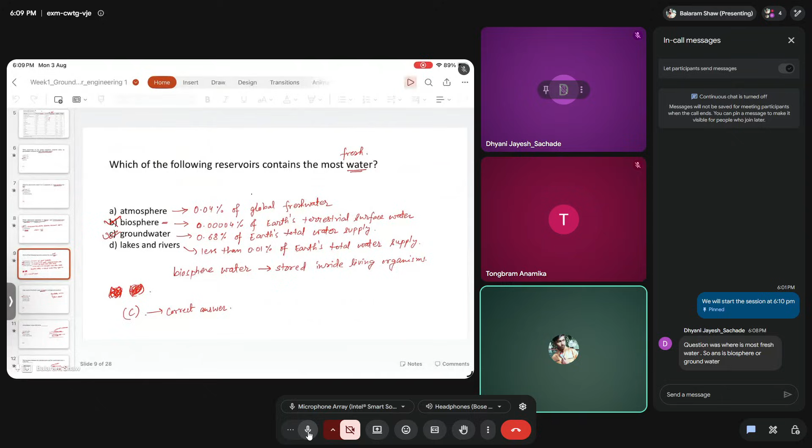Yeah, regarding that question, last time I have also put it in the... Let me check. Yeah, in this I have put. So here in the biosphere water, what we were referring to was the water which is stored inside the living organisms. So if you consider that, then it is nearly 0.00004% of the Earth's terrestrial surface water. So in that case, as I wrote here, and this work I have also shared in the folder, you can check there. So you can see here for atmosphere.

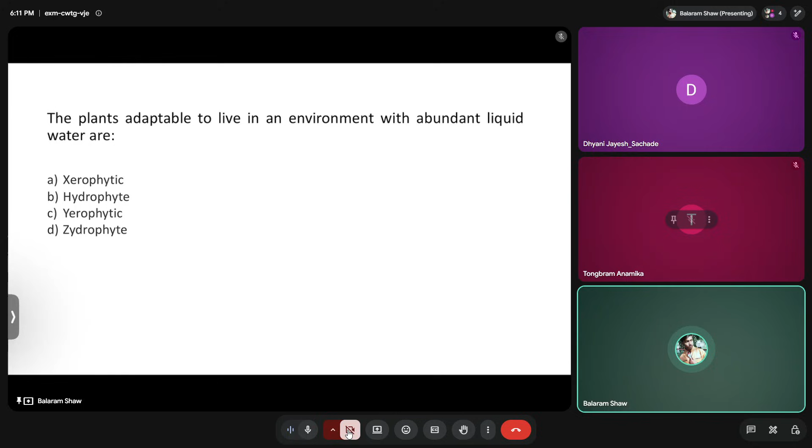Okay. So in this week's lectures, before going to that, in the last week at the end or in this week only, we had a question: the plants adaptable to live in an environment with abundant liquid water are... So you can put your answers in your chat box or you can speak. Okay. So last week also we have discussed, and this week also, the question here is the plants which are adaptable to live in an environment with abundant liquid. What do you think the answer will be? A. Okay. Anyone else? Anamika.

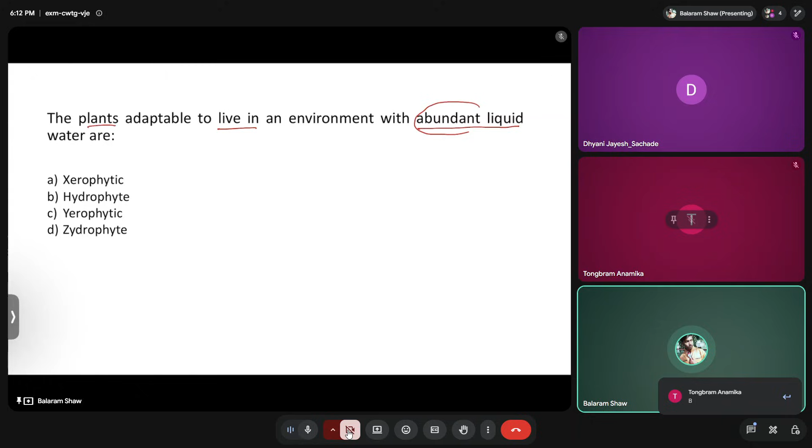Okay. So here, what is the question? The question is abundant liquid. Abundant liquid as in where enough amount of water is there. So xerophytic plants, as Dhyani said, are the plants which are adaptable to survive in an environment with little liquid water. Last week I discussed that in a desert environment, if we have to reduce the desertification propagation, we put xerophytic plants because those are the plants which need less water.

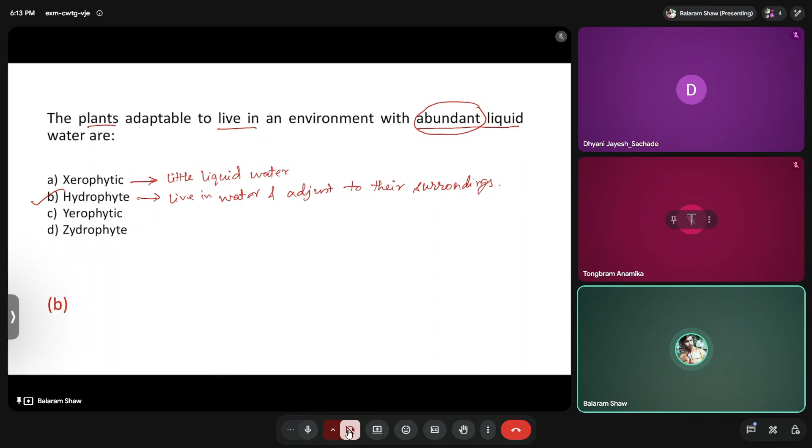Whereas here the question was with abundant liquid water. So hydrophytic plants are the plants which live in water and which adjust to their surroundings. So the correct answer for this will be B, that is hydrophytic plants. Okay. So before going to the other questions, let us discuss first. The first lecture of this week was related to surface water versus groundwater.

So we know what surface water is. Surface water is the water that is available on land, and it can be in any form. It can be in the form of rivers, oceans, seas, lakes, or something like that. Whereas, what is groundwater? Groundwater is the water that occurs below the earth's surface, right? So when it is below the earth's surface, it occupies all or part of the void spaces.

So if we write here, it occupies all or part of the void spaces. In many places you will see that void spaces is written in terms of interstices, so that is also used interchangeably. Okay, so groundwater occurs where it occupies all or part of the void spaces in the soils or geological strata.

So it occupies all or part of the void spaces in soils or geological strata. So why am I calling it all or part? Part is because all the rocks are not fully saturated, or let's say the voids in these soils or rock layers are not always filled with water. It is only possible when the voids are interconnected.

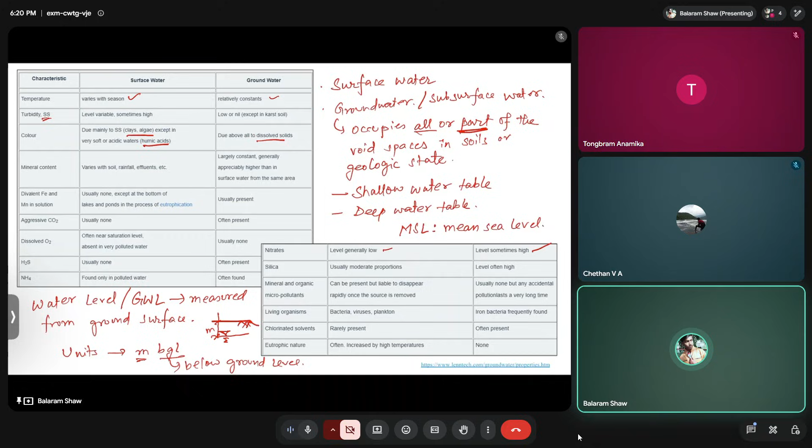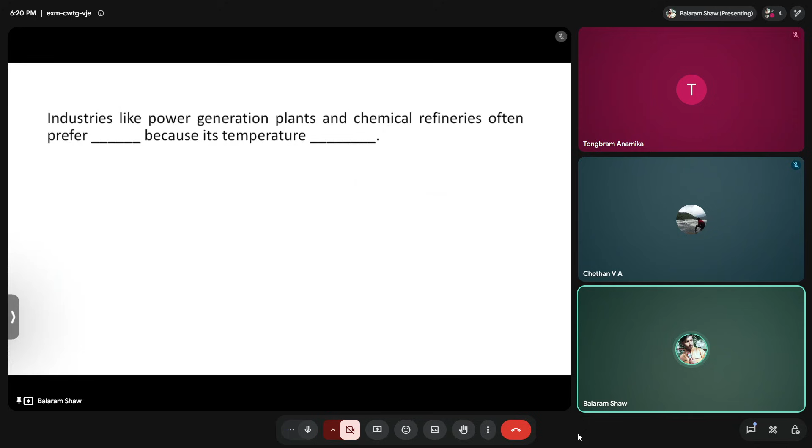Any questions here? If not, we'll move to the next part. Okay, so the question we have is: industries like power generation plants and chemical refineries often prefer blank because its temperature is blank. Can you guys give me the answer for this?

Anything that you can think of? So industries like power generation plants or chemical refineries often prefer... first option we have surface water or groundwater, because A and B are surface water and groundwater, and C and D are surface water and groundwater, because its temperature either remains steady or varies with season. So we know that for groundwater the temperature generally remains steady, right?

Or you can say relatively constant, right? So because of these characteristics, the industries like power generation plants or chemical refineries, where let's say if the temperature varies, then what will happen? They have to keep one other instrument or equipment so that it can have a constant temperature, so that they can use that water again for the next purposes. Whereas from groundwater, they are directly getting this kind of properties, and hence they will mostly use groundwater for their work. Okay, so industries like power generation plants and chemical refineries often use groundwater because its temperature remains steady, and therefore the answer will be option B.

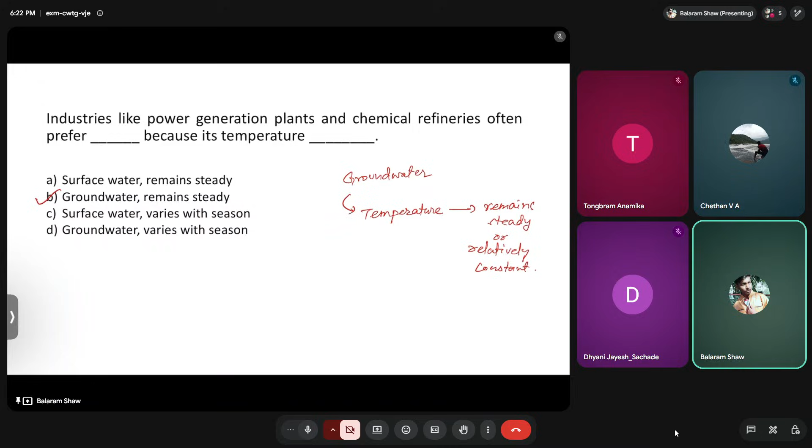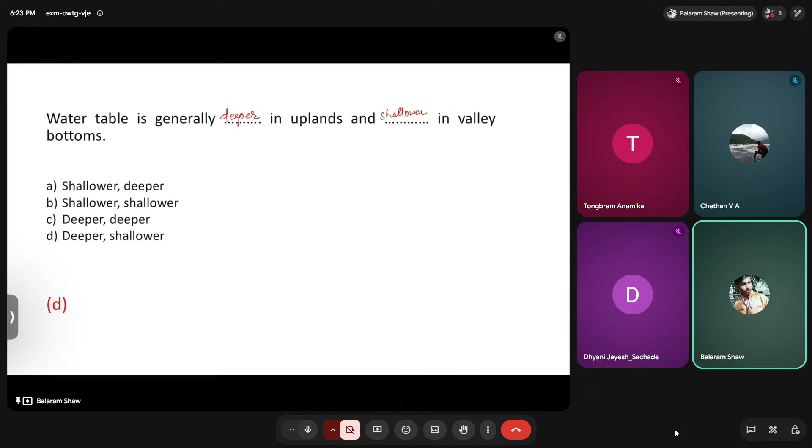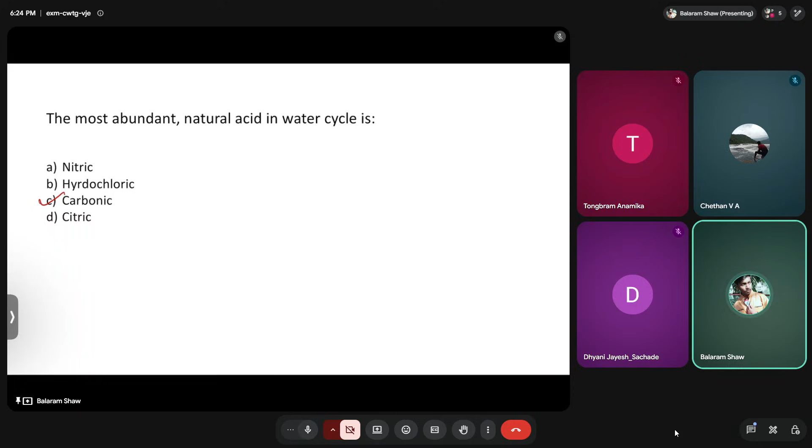Okay, the next question, this is just an information question, maybe you might not know also, that is fine. So the question is, the most abundant natural acid in water cycle is, anyone wants to give a guess on this? A, okay, anyone else? Yeah, nitric acid is not the correct answer. Mostly, the natural acid that is available in water cycle in significant amount is carbonic acid. Okay, which can make the water maybe a little hard or something. Okay, we'll move to the next question.

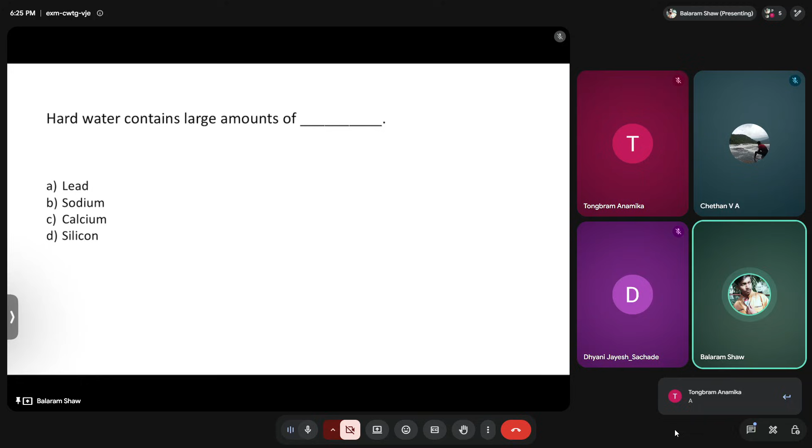That is, hard water contains large amount of dash. So generally, if you see the hardness of water, do you guys know what is the reason behind the hardness of water, or which, let's say, elements or compounds? A, okay. No, lead won't make it hard. So if you see the hardness of water, it is generally because of the dissolved calcium and magnesium salts.

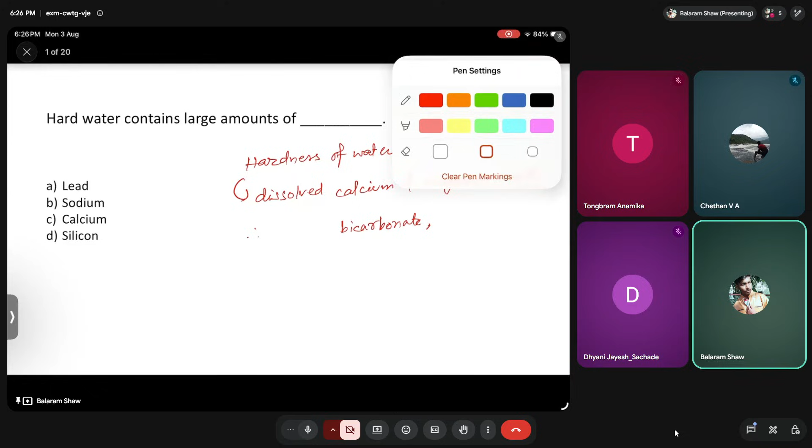Okay, so therefore, if you see which ions are there, then you will find either calcium is there or bicarbonate, that is HCO3 minus will be there. Sorry, calcium bicarbonate will be there. Wait a minute. Sorry. Yeah. So calcium bicarbonate. So in the form of calcium bicarbonate or magnesium bicarbonate or calcium sulfate or magnesium sulfate, in the form of either bicarbonates or sulfates, it will be there.

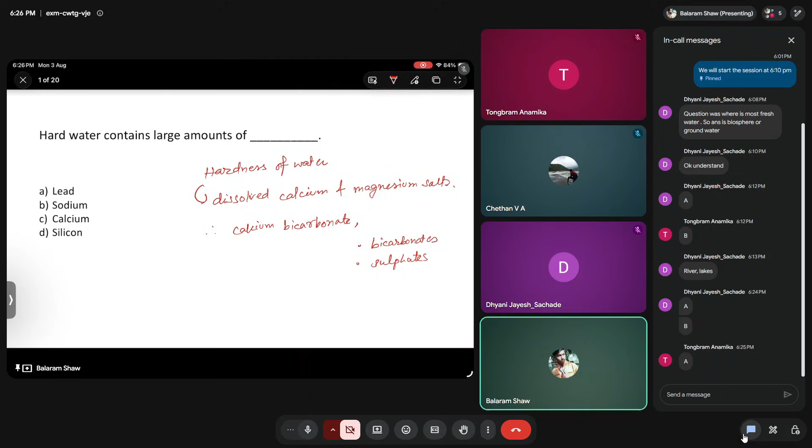Okay, so for this, what will be the answer? Can you tell me? C, that is calcium. Okay, fine. The correct answer will be C for this.

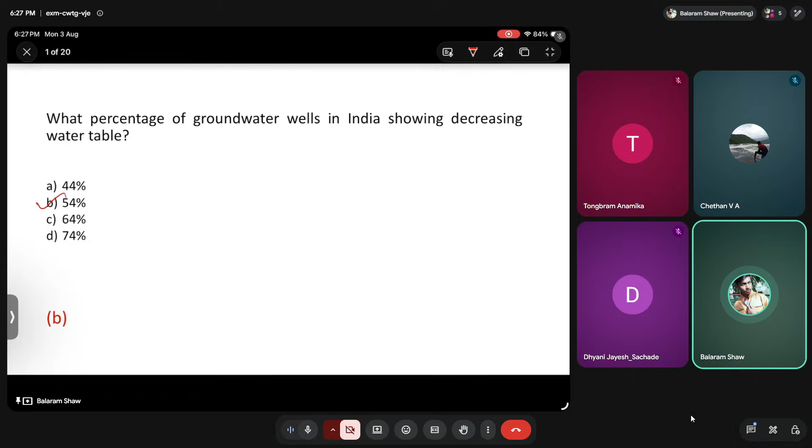Okay. So the next question is, water is not available for evaporation from. Yeah. So after this, there is one question. I want you guys to have some pen or paper with you so that you can solve. There will be one small problem question from this. Okay. Now coming to the question, what we have is water is not available for evaporation from. So we studied evaporation last time, right? We have studied about the water cycle.

In the water cycle, the major components are precipitation, evapotranspiration, then runoff, or the change in storage, right? One of them is evaporation. And remember, what is the difference between evaporation and evapotranspiration? Evaporation is the amount of water which is coming from the ground into, let's say, our atmosphere. So in that it is from open water, okay, open water or land or something like that.

But if it is coming from vegetation, we call that transpiration. And that's why over land, whatever water is coming out in terms of water vapor, we call that evapotranspiration. Okay. So now the question is, water is not available for evaporation from. Option C, right? Anyone else?

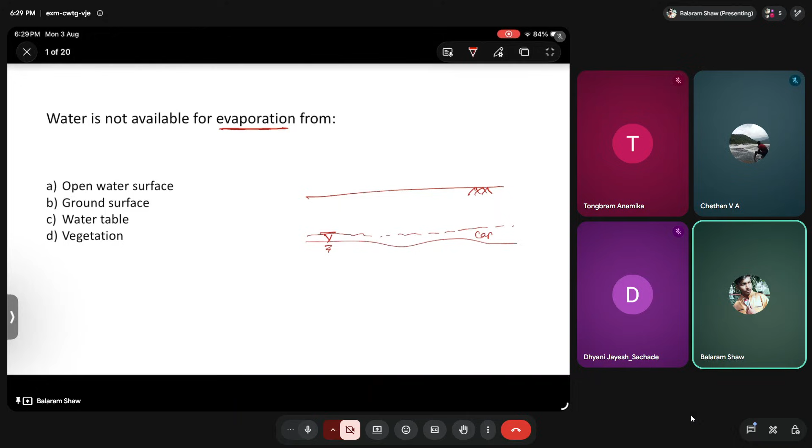Yeah, so let's say if we make a schematic, let's say this is the ground surface, okay, and somewhere here we have the water table, and if you remember, above the water table there will be one layer which will be due to capillary rise, right? It will be a capillary fringe. And if you see before that, this zone is called the zone of aeration.

Whereas, if we consider one impermeable strata, this we call the saturation zone or zone of saturation, right? So there will be some water here in the form of soil water or soil moisture, right? There will be one intermediate zone, and so on. So this one we know is the water table, and we'll have, let's say, some vegetation.

Okay, so from the surface there will be evaporation, right? So here the transpiration that is happening, we are calling that also evaporation for now in this question. So from vegetation also there will be some evaporation. From open water surface it will be there. From vegetation it will be there. From ground surface also it will be there because there is soil water in it.

So this soil water will also evaporate. So the correct answer, in which the water is not available, is water table. Before the water table, mostly the water can evaporate. After the water table, generally it does not. Okay, so the correct answer is C.

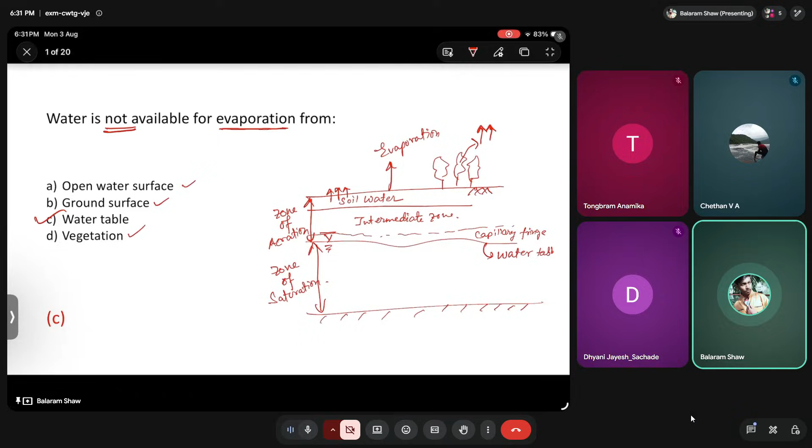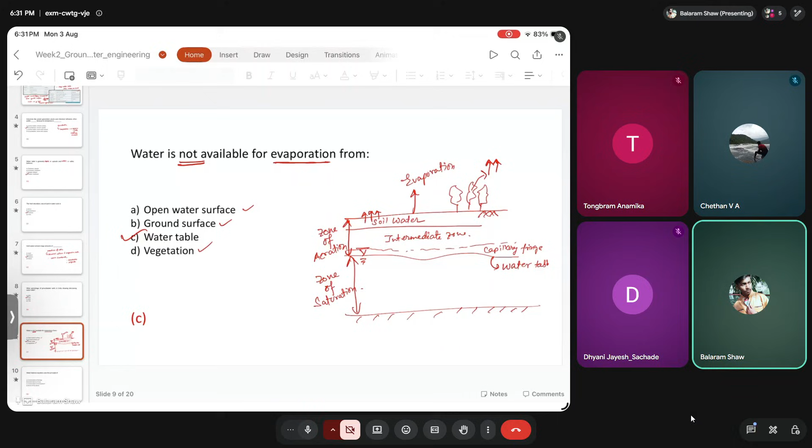Water balance equation uses the principle of, okay, so for this, first I'll explain a little. So while studying the water cycle, we have studied the components of the water cycle, right? Precipitation, evapotranspiration, runoff, or infiltration, percolation, then groundwater flow, storage change, and so on. However, if you see the water balance equation or water budget equation, how can you write it?

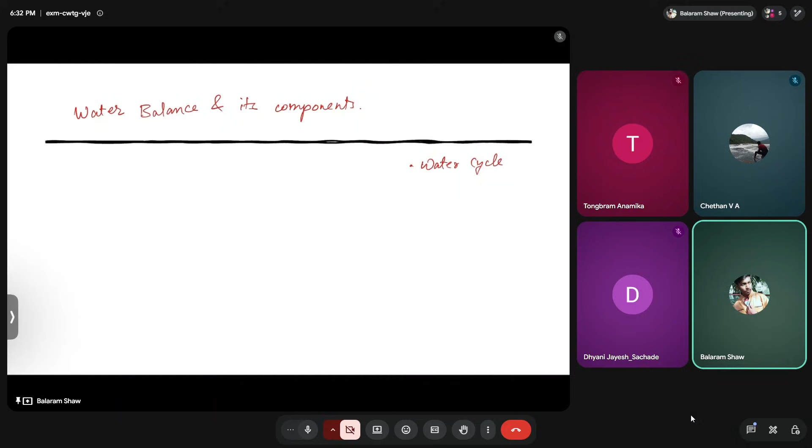Let's say you consider a system first, okay, you can consider any system. So in any system, if there is some inflow and there is some outflow, then whatever is remaining will be the storage in the system, right? You can consider the whole thing as a system, or you can consider a small part as a system. It depends on how you are seeing the system.

So in the case of water budget or water balance, what we are doing here is applying the conservation of mass, that is, whatever mass is going in and coming out will be equal to some change in storage. Okay, so if outflow is more than inflow, then will the change in storage be positive or negative? It will be negative, right?

Here we call this the water budget equation or water balance equation. So in the case of water budget, how will you write the major components? The conservation of mass here is nothing but the continuity equation, right? So let's say in water we are considering a basin, which is a system.

So if you see the major components, it should be P minus Et minus Q or R, whatever you say, equals to the change in storage. Or you can write it as dS/dt also, if you see that basin in which we have drawn S here. So we can write this as dS/dt also. Okay, so this is applicable where we have a closed system.

We can have some open systems also. What is an open system? An open system is, let's say, if there is some inflow or outflow which is out of the system. Let's say if some surface water is contributing from a different basin, we call that an open system. What we are considering here is that precipitation is the only input source. If you are bringing water from some other basin, it won't be a closed basin. Okay, so the correct answer for this will be conservation of mass. So the correct answer is B.

So where do we use this water balance equation? Mostly it is used in all aspects of management of the water supply, or if you want to predict whether there will be water shortages in the coming months, or in the coming year, you can use the water balance approach. So it is mostly used in groundwater hydrology, surface water hydrology, irrigation, runoff assessment. For flood control also it is used, and for pollution control also this conservation of mass can be used.

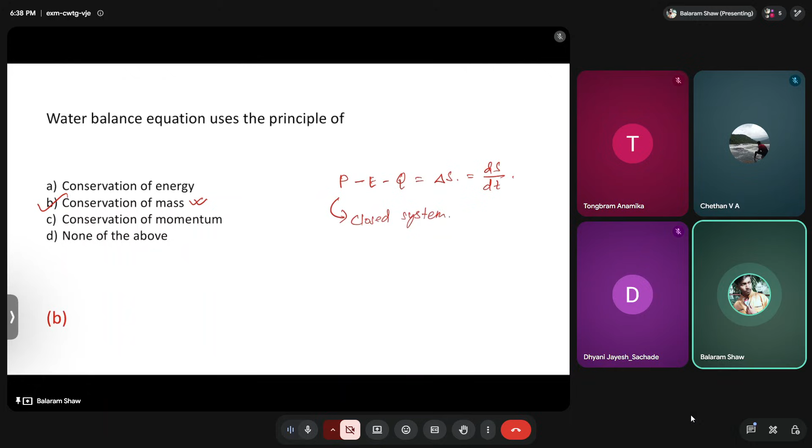And if we know how much water is where, if we can estimate each component, we can also design the subsurface drainage system, which can be horizontal, let's say pipe flow. The pipe flow designing part you will study in any fluid mechanics subject, like how the pipe flow will be and how it is designed. And it can also be vertical drainage systems, let's say drainage by wells and so on.

Okay. So we'll move to the next question. Any questions till now? Okay, we'll move to the next question.

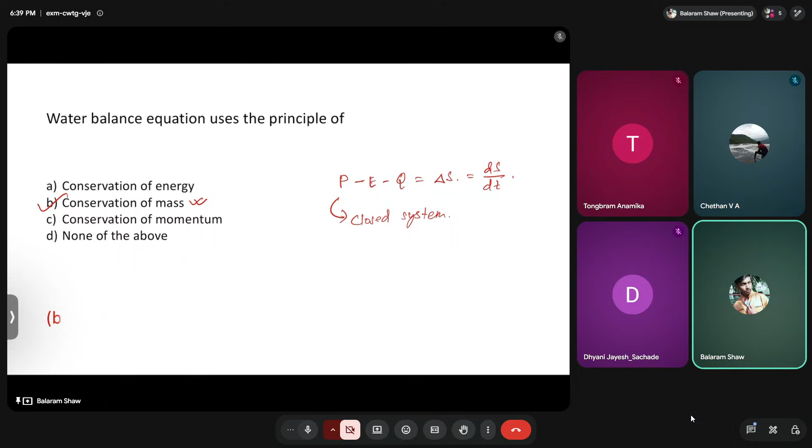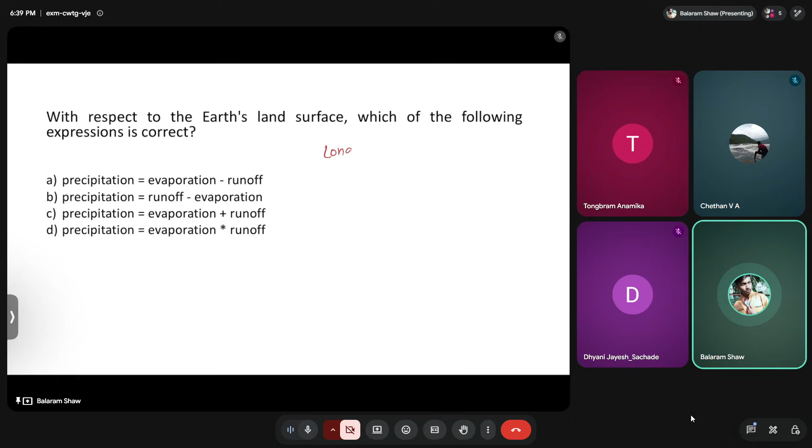So the next question is, with respect to the Earth's land surface, which of the following expressions is correct? This one is a simple question. Here we are considering the long term, let's say 100 years. So for 100 years, whatever storage change is there, we are considering as negligible. Okay, so based on this, can you answer this? What will be the answer for this?

So can anyone guess what will be the answer for this? So what we have said is that for the long term, let's say for 100 years or something, we are considering that the change in the total water storage is zero. And based on that, can you answer the question? Any guesses?

Okay, so just now we have seen that inflow minus outflow should be equal to change in storage, right? Plus minus del S, or change in storage. Here we are saying that this del S is zero. So what is the inflow? Inflow is the precipitation, right?

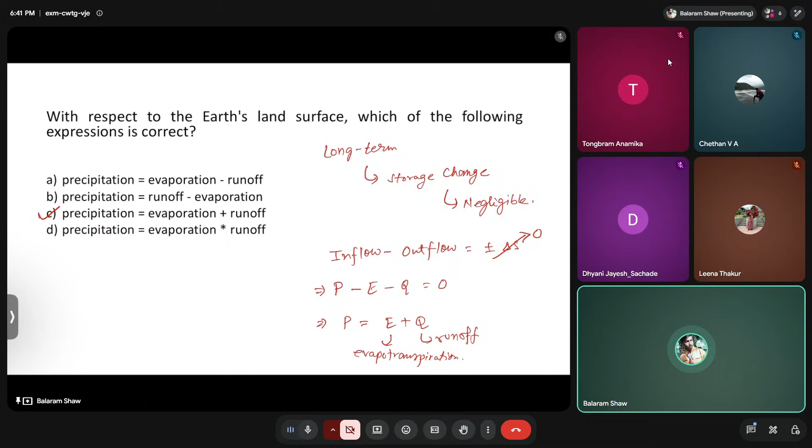And what are the outflows? Outflows are evapotranspiration and runoff, right? It is equal to zero. If we write it in the form of P, we can write it as E plus Q, right? Q is the runoff and E is the evapotranspiration. Okay, so the correct answer will be C, that is precipitation equals evapotranspiration plus runoff. So the correct answer is C.

Okay, so the next question is a small problem which you need to solve. The question is, a lake had a water surface elevation of 103.2 meter above the datum. Consider this datum as any reference, at the beginning of a certain month. Let's say January. In the beginning, the water surface of the lake was around 103.2 meter.

Now in that month, the lake received an average inflow of 6 meter cube per second from surface runoff sources. And in the same period, the outflow from the lake had an average value of 6.5 meter cube per second.

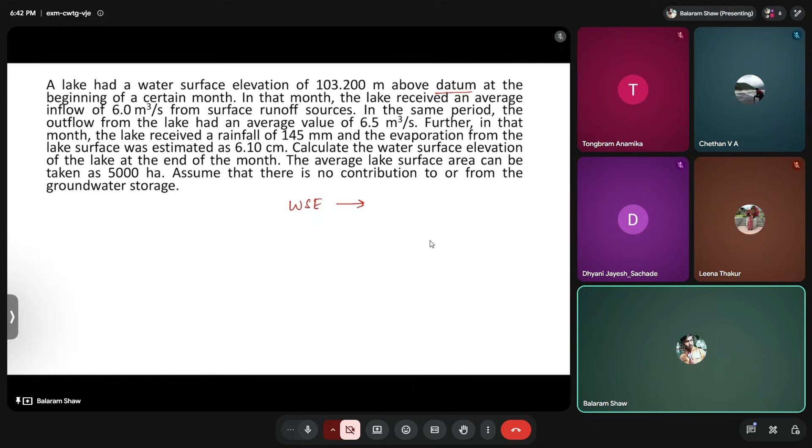Now, what all we have: water surface elevation of the lake. Let's say I write 1 and 2. 1 I'll write for the beginning. So it is 103.2 meter above the datum or above reference.

Now in that month, the lake received an inflow of 6 meter cube per second, and in the same period there was an outflow of 6.5 meter cube per second. Further, in that month the lake received a rainfall of 145 millimeter, and evaporation from the lake surface was estimated at around 6.10 centimeter. Just keep note of units.

So we have to calculate the water surface elevation of the lake at the end of the month. So we have to know what is WSE2, right? Also, it is given that the average lake surface area can be taken as A equals 5000 hectare.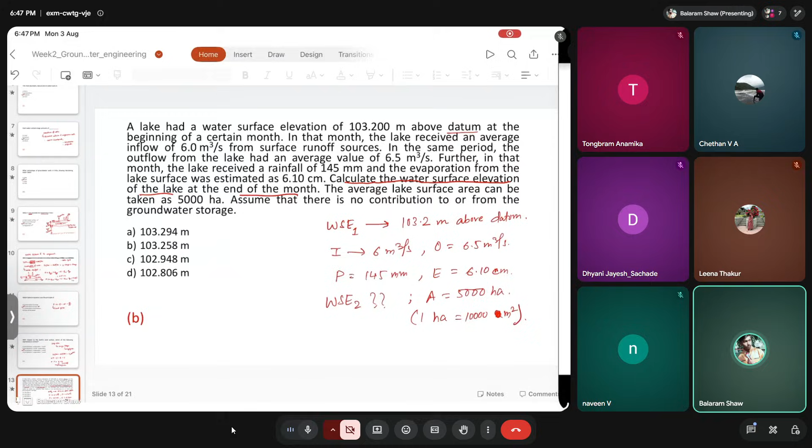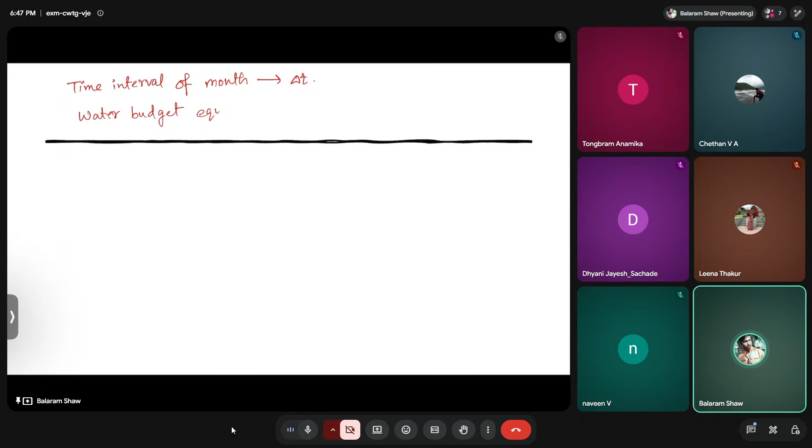I'll start solving also, and you guys can also do it. So firstly, we consider the time interval of the month as del t. Now if I ask you to write the water budget equation for the lake, how will it be? It will be simple, right? Input volume minus output volume will be equal to the change in storage of the lake.

Now for the input volume, what do we have? We have an inflow, right? The lake received an average inflow of 6 meter cube per second from surface runoff sources, and in the same period outflow from the lake had an average value of 6.5 meter cube per second. So if I consider inflow as I, then I into del T will be the volume.

Because I is in the unit of discharge, that is meter cube per second. How will we get the volume from discharge? You just need to multiply it by the time. Here we have considered del T as the time interval of the month. Plus, what other input source do we have?

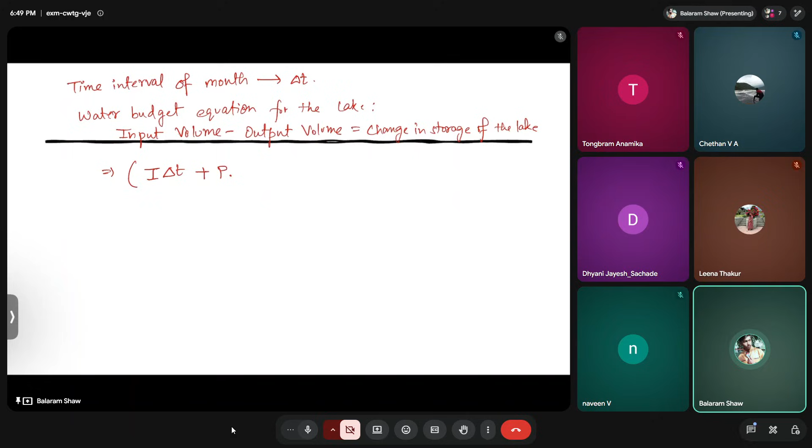We have precipitation, right? But now the precipitation is for the whole lake. However, this precipitation is in which unit? It is in millimeter unit or depth unit, right? And here we are talking about volume. So how will we calculate the precipitation over the whole area or over the whole lake? We'll just multiply with the area A.

Okay. So this is the input volume minus what will be the output volume? Let's say we consider output as O, and the time interval as del T, and any other output we have is the evaporation from the lake. Not the evapotranspiration. So E, let's say, is the evaporation; evaporation again is in depth unit. So we have to convert it into volumetric unit. We will multiply it with the area of the lake, that is A.

Okay. So now we have input volume, we have output volume. If we write the change in storage of the lake, for now I'll just keep it as delta S. Now you just need to put all these things from the problem, and then we will get how much water surface elevation is there at the end of the month. Okay, till this it is clear.

Are you guys going in this direction or anything else you guys are doing? You can do it in any of the units. Here we are talking about input in the volumetric unit. You can go into depth unit also. Just note that you should be consistent with the units. Okay, I'll calculate the input now.

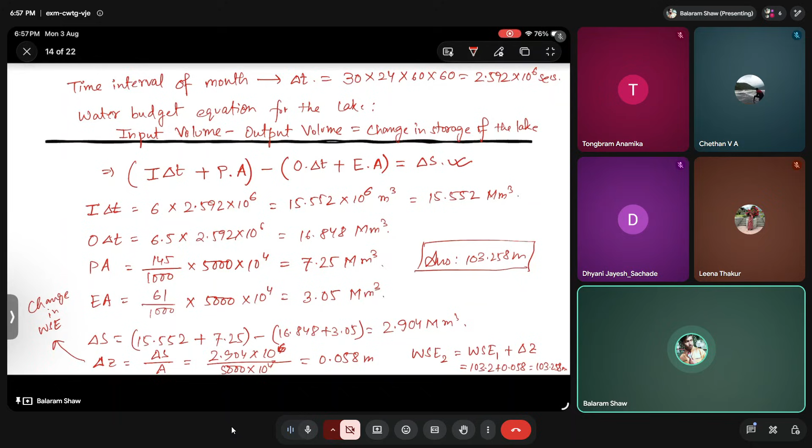That is around 103.258 meters. Okay, so answer is 103.258 meters. Is it clear? So the correct answer is B, that is 103.258 meter. Okay, fine. We'll move to the next question then.

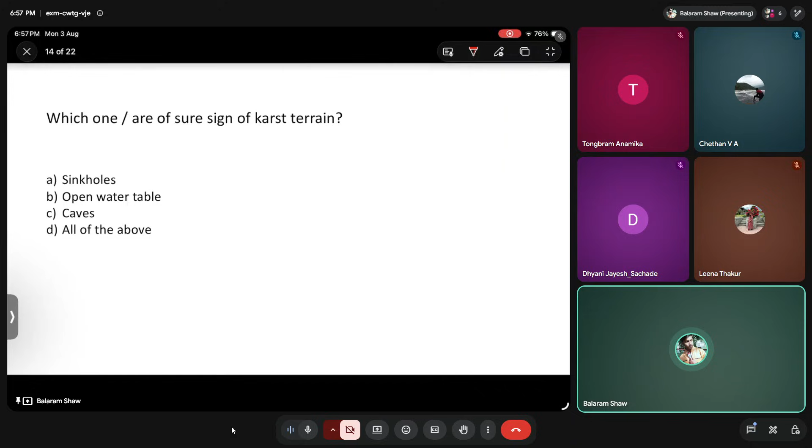So the next question is, which are sure signs of karst terrain? So we know that for karst terrains there will be an open water table where there will be some caves kind of things and sinkholes and all. So the correct answer for this will be all of the above. Okay, now moving on to aquifers.

Okay, so we know what is aquifer, right? Aquifer is, let's say, an underground layer. We have discussed aquifers in the last session also, I guess. Still, I'll maybe write a small note. If you see different books and different literatures, you will see there are various kinds of definitions that you will get for aquifer. So what is aquifer?

Aquifer, you can consider one underground layer in which there will be water, or let's say aquifer is an underground layer of water-bearing permeable rock, rock fractures, or unconsolidated materials. So maybe the most approachable or understandable definition is: an aquifer is a body of porous rock or sediment saturated with groundwater.

Okay, so now this aquifer can be classified in different forms. Maybe I'll write it in some other page. So if we talk about types of aquifers, aquifers can be classified based on several aspects. It can be classified based on, let's say, type of porosity, or it can be based on the rock type. So these are based on the geological origin.

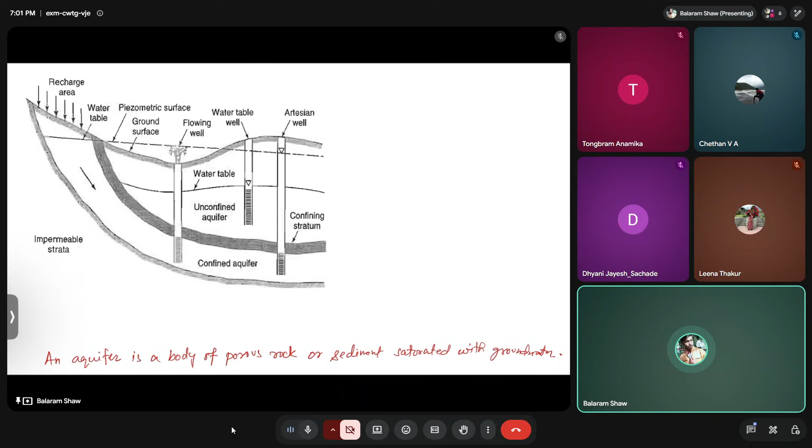So if you see the last figure here, we have a schematic which illustrates both the confined and unconfined aquifer. Here you can see we have confined aquifer, and we also have unconfined aquifer. So what is the meaning of this unconfined aquifer or confined aquifer? Generally, we call the unconfined aquifer a water table aquifer sometimes, and confined aquifer is also called artesian aquifer. We'll come to that. But before that, what is unconfined aquifer?

Unconfined aquifer is the one in which the water table varies in undulating form or in slope, depending on areas of recharge or discharge, pumpage from wells, or permeability. So if this is the water table, what is the pressure here? The pressure will be the atmospheric pressure. If in any aquifer atmospheric pressure is there and it receives water directly from the surface, then we call that

an unconfined aquifer. Here you see why we are saying unconfined: because above this, whatever layer is there, from there water can permeate, infiltrate or percolate. So the main thing is that the pressure on the water table is always atmospheric, and below that there is an impermeable strata. This one is an impermeable strata.

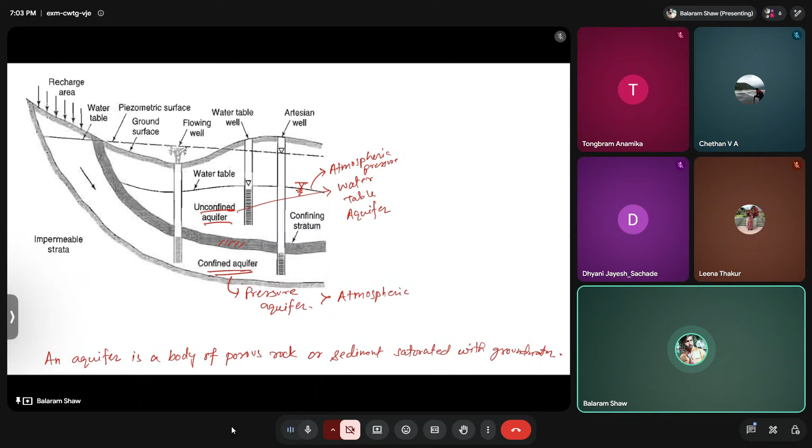Okay, it occurs where groundwater is confined under pressure greater than atmospheric pressure, and this pressure will always be more than the atmospheric pressure. Somewhere you will see it is also called an artesian aquifer. There is a small story behind why this one was called artesian aquifer. Just in 2 minutes I'll say.

Here you can see there is a flowing well, right? So this well was first named. The term referred to a well with free flowing water, but presently it is being applied to any well penetrating a confined aquifer. So it was named after one well, and later all the confined aquifers you can call artesian aquifers.

Because of the pressure, if you drill one well and try to pump water, what is happening? You don't have to pump water, the water is coming by itself, and that's why here you can see there is a fountain of water, and that's why we call that a flowing well.

Okay, so from the ground surface there will be recharge also, right? You can see a dashed line here, which we call the piezometric surface. This piezometric surface, or potentiometric surface, of a confined aquifer is an imaginary surface which coincides with the hydrostatic pressure level of the water in the aquifer.

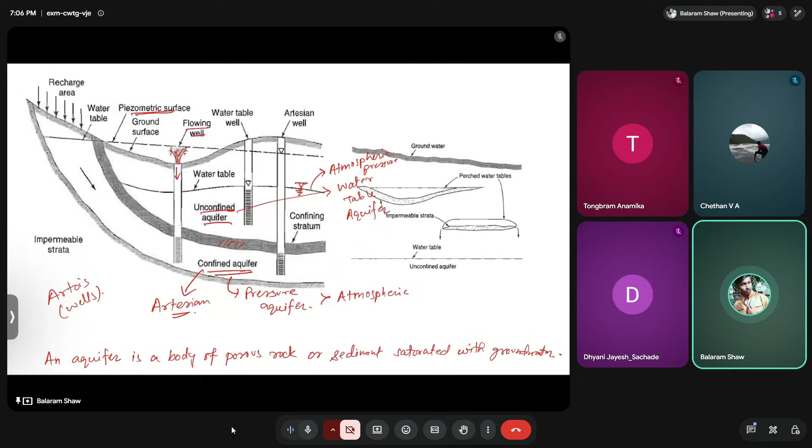Yeah, we also talked about leaky aquifer, right? So, what is a leaky aquifer or semi-confined aquifer? An aquifer which is overlain or underlain by an aquitard. We'll come to what aquitards are. But before that, the question before, right? This is done.

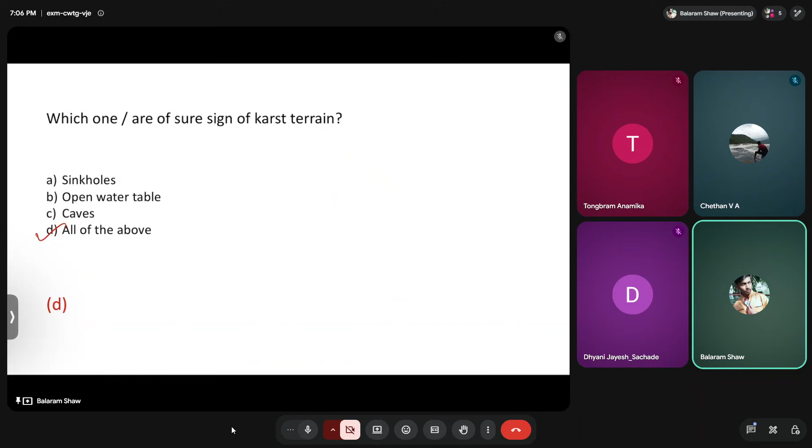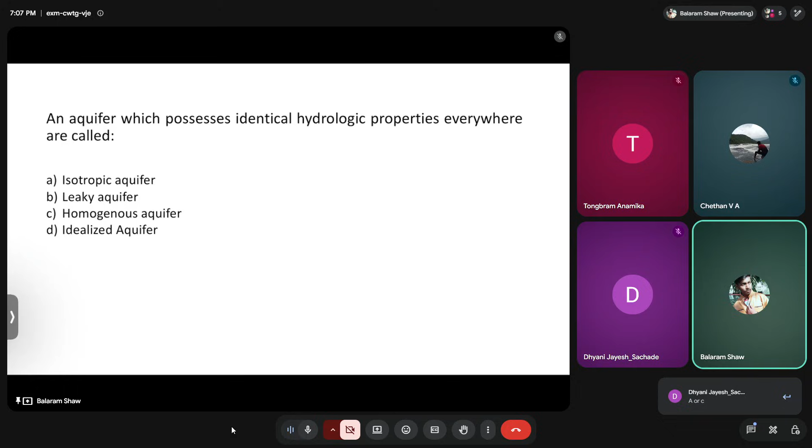Okay, so the next question that we have is: an aquifer which possesses identical hydrological properties everywhere is called? Any guesses for this? C. Okay. Yes. Okay. So what is the question here? An aquifer which has identical hydrological properties everywhere.

If for any property we see identical properties everywhere in a 2D plane, we call that a homogeneous layer, right? So for now, we can call this aquifer a homogeneous aquifer. However, let's talk about the idealized aquifer. Mostly we consider an idealized aquifer for our theoretical work or theoretical analysis. So what is an idealized aquifer?

It is an aquifer which is homogeneous, which has identical properties everywhere. In this case, we have identical hydrological properties everywhere. And isotropic. What is isotropic? Anyone? What is an isotropic aquifer? Or, what is isotropic if you just go by the word?

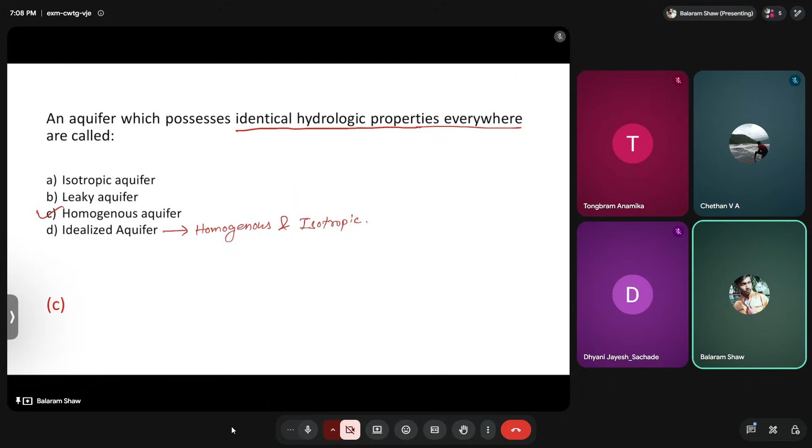An isotropic layer is one in which, if you go in all three directions, the property will not change. So that is isotropic. So if we consider an aquifer homogeneous and isotropic, we can call that aquifer an idealized aquifer. Okay, so the next question is, which of the following is an aquitard?

Okay, maybe before that, we'll see what is aquifer, aquitard, and so on. So now we know one of the saturated formations, right? The main saturated formation that we have talked about is the aquifer, right? What is an aquifer?

An aquifer is defined as a saturated permeable geological unit that can transmit or yield significant quantities of water under ordinary hydraulic gradients. So again, it can contain water, and it can yield water, meaning you can extract water, or it can also store water. Water can permeate through that layer. We call that an aquifer. Whatever we will talk about now is the saturated formation, which can be classified into four categories.

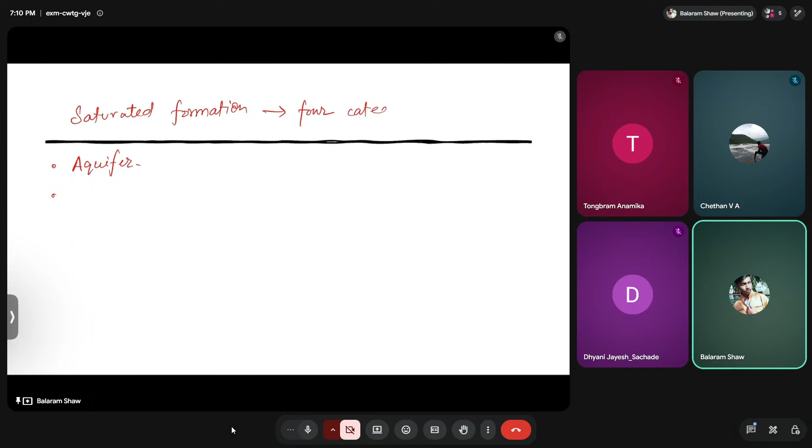Okay, so the next one which we have, let's say if you give examples of aquifers, most of the aquifers you will see are unconsolidated sands and gravels, right? Because if you consolidate, the permeability will get low. The water won't be able to pass through the voids because the voids will be less for a consolidated soil, right? Other than that, we have permeable sedimentary rocks such as sandstones and limestones. Then heavily fractured volcanic or crystalline rocks are also there.

Okay, so the next one which we have is aquiclude. What is aquiclude? Aquiclude is a saturated but relatively impermeable material. So if I write it in a few words, it will be, although porous, it can absorb water. Because it is porous, it can absorb water, but it is impermeable.

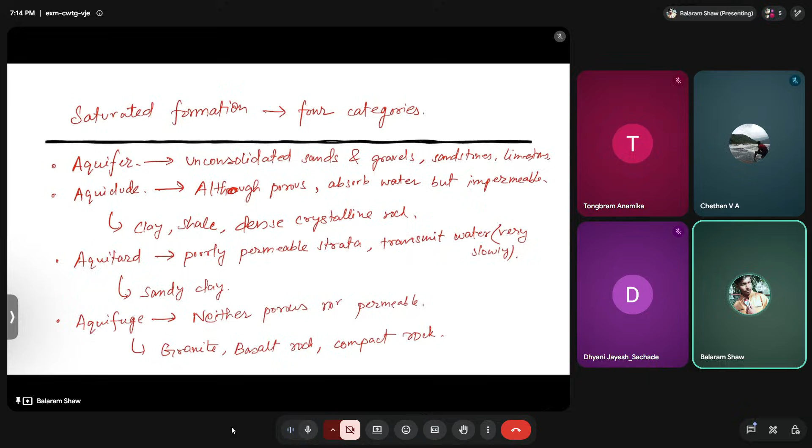Okay, so with this, maybe we'll go to the question. Which of the following is an aquitard? Can you give me the answer for this? Any guesses? Option D. Okay. Anyone else? So the correct answer is B.

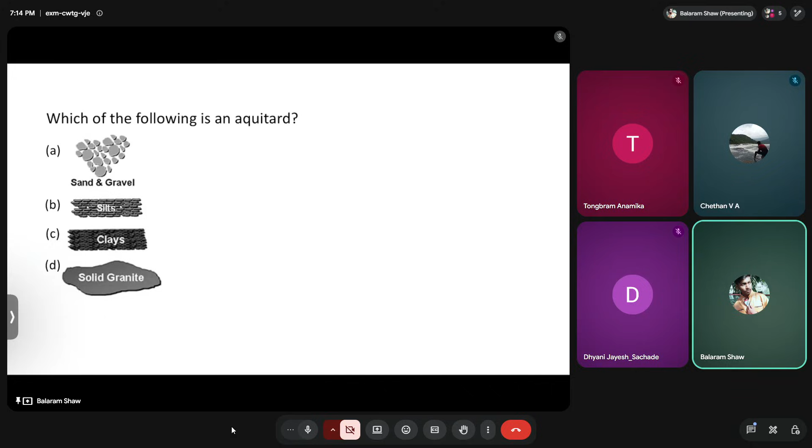We talked about that right now, right? Solid granite is neither porous nor does it allow water to permeate through it. So solid granite will be an aquifuge. Clays, we know their permeability is very low. However, they can still store water, right? So this one will be aquiclude, and the aquitard is B, that is silts. And the first one, we know water can be stored easily and yielded easily, so it is an aquifer, right?

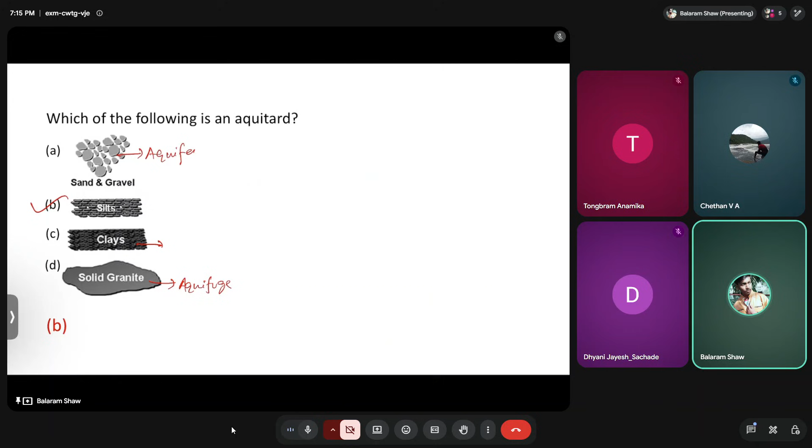So if we see the whole picture, sand and gravel is an aquifer. Silts is an aquitard because it is a low permeability material which could transmit water under vertical gradients only. Third is clay, that is aquiclude, an impermeable material which cannot transmit water. And solid granite is impermeable as well as it cannot contain water. Is this clear? Any questions? If not, we'll move to the next question.

So the next question is, most of the water coming out of continental hot springs is: meteoric water, magmatic water, seawater, or metamorphic water. Anyone? We have seen this in the last class also, I think. So the correct answer is meteoric water.

So now we are done with aquifers and types of aquifers. We'll move to one of the processes which we have seen in the hydrological cycle, that is infiltration and percolation. There is a small difference between infiltration and percolation. Mostly infiltration will be up to a shallow depth from the ground surface, whereas percolation will be deep, let's say beyond the water table.

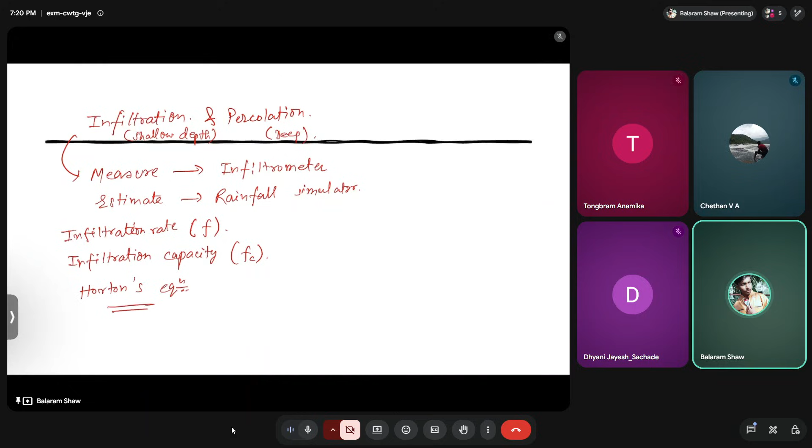I will come to this, but just to note that Horton has given one equation, Horton's equation, using which you can calculate the infiltration rate at any time t, and it is given as infiltration capacity plus (initial infiltration minus infiltration capacity) into e to the power minus k into t. So t is the time for which the infiltration occurs and k is a constant. This k will depend on vegetation and soil, what kind of soil is there, how dense it is, and so on.

Now let's say if vegetation is there, then what will happen? More of the water will be infiltrated, and hence the k value will be less. Whereas if there is some bare soil, infiltration will be less, and hence the k value will be larger. Okay. So with this, maybe we will move to the next question.

So the question is: if the rainfall intensity is less than the infiltration capacity, then the infiltration rate equals what? Anyone wants to answer this? Let's consider the rainfall intensity as I, infiltration capacity as FC, and the infiltration rate we call F. If the rainfall intensity is less than the infiltration capacity, then the infiltration rate will be equal to what?

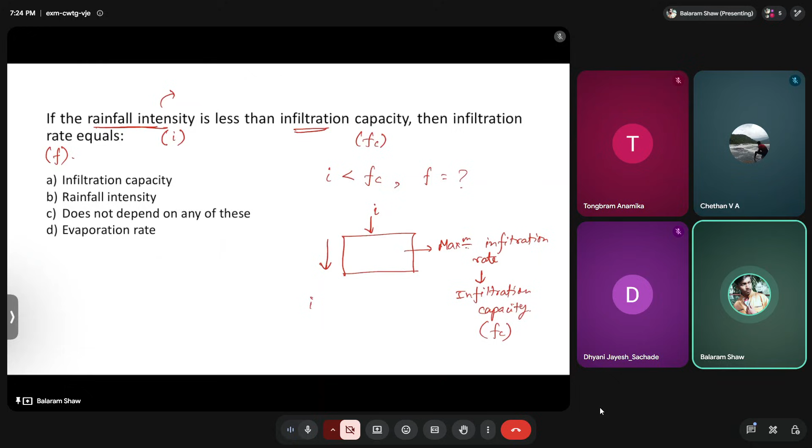Okay, now the rainfall intensity is I, let's say, and we have I less than FC. Okay, then what will be the infiltration rate into it? Let us consider it as, let's say, you are the rainfall here, and you are traveling with bike. You know your maximum capacity is 100 kilometer per hour, and you can travel at any rate into that. But here, at what rate are you traveling? You are traveling at a rate of rainfall intensity.

For example, the rainfall intensity is, let's say, 40 kilometer per hour. I mean, I'm just explaining to understand. So you are traveling at a speed of, let's say, 40 kilometer per hour, and the maximum you can reach is 100 kilometer per hour on that road. So now if the speed that you have, let's say 40, is less than 100, then at what rate are you traveling? You are traveling at the rate of rainfall intensity here, right?

So that's why if the rainfall intensity is less than the infiltration capacity, then the infiltration rate will be equal to the rainfall intensity. I hope you understood. Okay, Anamika, did you understand?

Okay, now let me give one more scenario. Case 2, let's say. If the rainfall intensity is greater than the infiltration capacity, then what do you think the infiltration rate will be? Now I'm saying that rainfall intensity is very high, higher than the infiltration capacity. Then what will be the infiltration rate?

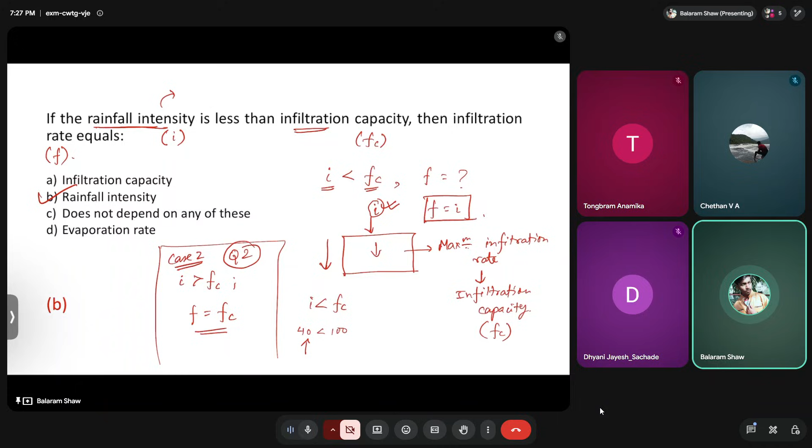Yeah, so in this Horton's equation, what are we after? We are after this, that is the infiltration rate at any time t. So this equation was given by Horton using some data. What they did is they used data for one place, and then they just fit one curve into it, and they found this, where they are considering an exponential decay with one constant k, and this one is the initial infiltration rate.

Initial infiltration rate, let's say at time t0. If there is no rain, I mean infiltration will be there every time if it is, say, semi-humid or semi-arid. But let's say if the soil is fully dry and there is no water to infiltrate, then at the beginning the infiltration rate will be zero, right?

And this FC, as I said, is the infiltration capacity, and from that analysis they found this equation where the infiltration rate is equal to the infiltration capacity plus some term which is exponentially decaying. So let's say we want to plot this, how will it be? Infiltration rate on the y-axis and t on the x-axis. Then we see at time t equals 0, what will happen?

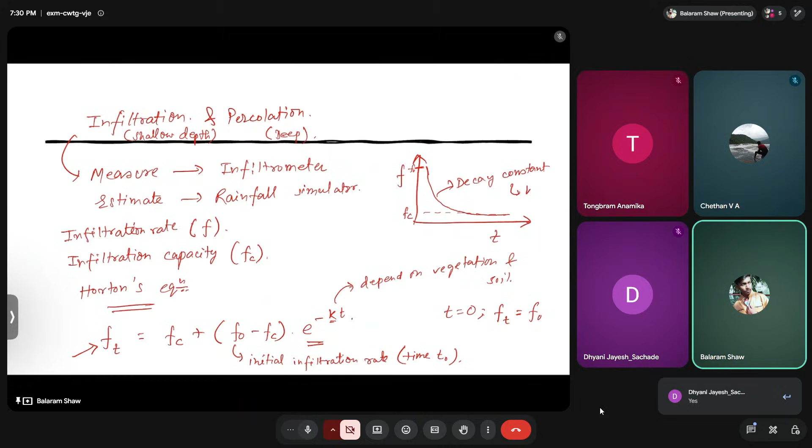So let's say here we have F0. It will start from somewhere here, and as time moves, it will be exponentially decaying, and then it will reach one value. This one will be the infiltration capacity, Fc. Okay, is this equation clear with this curve? And the decay constant will be K. Okay, fine. We'll move to the next question then.

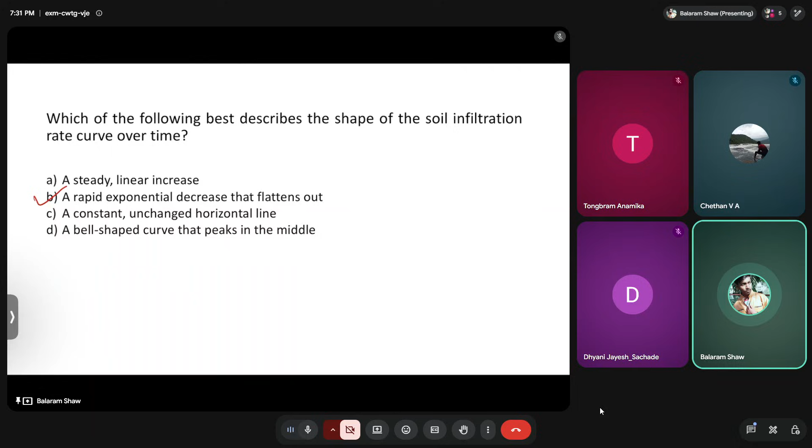The next question is, I wanted you to think about this, but anyway I explain. Which of the following best describes the shape of the soil infiltration rate curve over time? Just now I have shown this. What will be the answer for this? B, correct. Because of the exponential term, there is a rapid exponential decrease that flattens out at infiltration capacity. So the correct answer is B.

Maybe this is the last question. In infiltration and percolation, the last topic that we touched upon was seepage, right? What is seepage? Seepage is like infiltration, downward and lateral movement of water into the soil or substrata from a source of supply, such as a reservoir or irrigation canal. This seepage water can reappear after some time because of topographic contours or water table.

So what are the factors that can affect seepage loss? Maybe you have seen that, so we'll directly go to the question. Which of the factors does not affect the seepage loss from the reservoir or canal? Any answer for this? Wetted perimeter. Okay. Just to understand, let's first start with soil permeability.

What is permeability? Permeability is the property of the soil through which it allows any liquid to move through it, right? If a soil has less permeability, the movement of water will be less. If the soil has more permeability, more water can flow through the interconnected voids. Seepage is infiltration downward along with lateral movement of water, so it depends on soil permeability: low permeability, less seepage loss; high permeability, higher seepage loss.

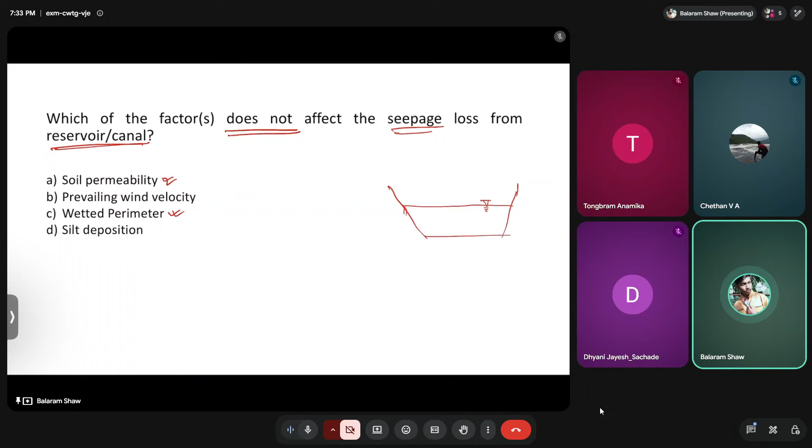Third one is wetted perimeter. Here I am talking about a reservoir or canal. Let's say one canal is there, which is trapezoidal, and water is flowing somewhere near this. Wetted perimeter is the perimeter which is getting wet because of this water. If the wetted perimeter changes, the seepage loss changes, since water will seep into the layers. So it will also depend on wetted perimeter.

Next one is silt deposition. If over time silt is getting deposited, water won't be able to flow downward, and that's how seepage loss will change. So the factor which does not affect seepage loss is prevailing wind velocity. Wind velocity mostly affects evaporation from the open surface, not seepage loss. So the correct answer would be B, prevailing wind velocity.